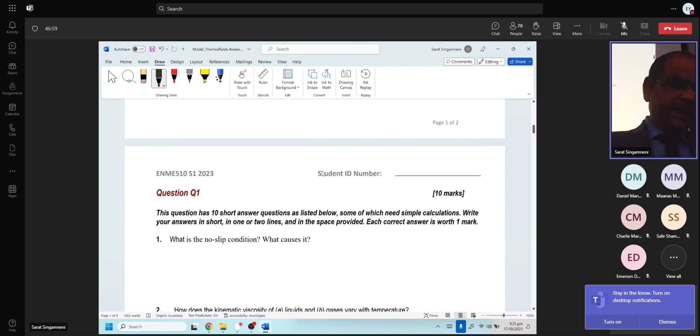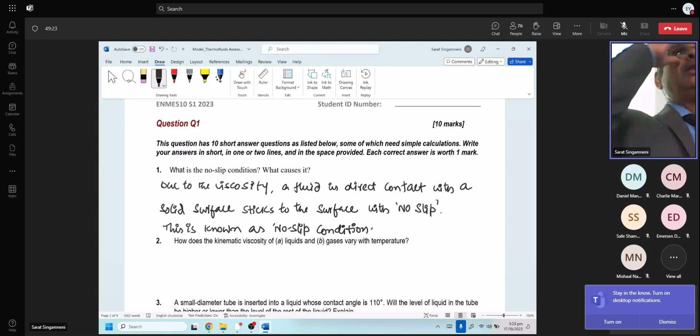What is the no-slip condition? What causes it? The viscosity actually causes this. So I'm just writing, just like I'm writing an exam. The condition leading to the stagnation of the fluid layers close to a solid surface due to viscosity is known as the no-slip condition. This leads to the formation of a boundary layer where the velocity of the fluid flow varies from zero on the surface to the actual flow velocity at some distance from the free surface of the solid.

How does the kinematic viscosity of liquids and gases vary with temperature? We discussed this in class. In the case of liquids, kinematic viscosity, nu, is equal to mu over density. That is kinematic viscosity. And that nu decreases.

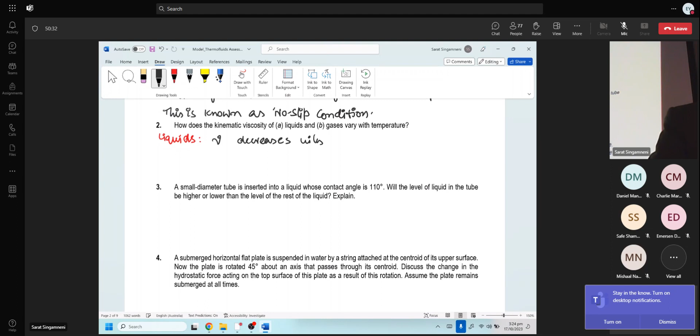And in the case of gases... In the case of liquids, as temperature increases, the resistance between the particles decreases, which is the root cause of viscosity in liquids. So as temperature increases, it becomes easier to make the fluid flow because the viscosity decreases. But in the case of gases, as you increase the temperature, the intermolecular collisions increase, and they are the ones causing viscosity. So that viscosity will be increasing with temperature.

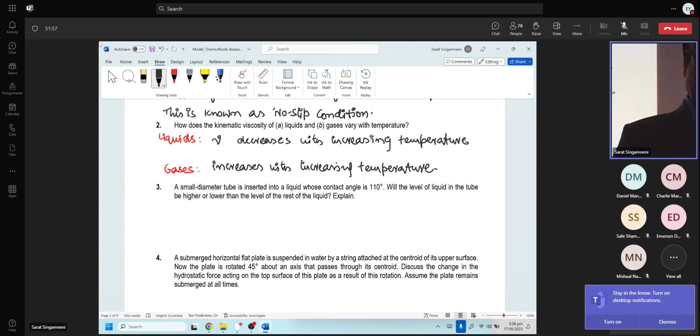A small diameter tube is inserted into a liquid whose contact angle is 110 degrees. So contact angle phi equals 110 degrees in this problem. Will the level of liquid in the tube be higher or lower than the level of the rest of the liquid? If you remember, there's the equation for this.

It's the capillary rise. Let's go to the formula sheet now. This is the formula sheet we're using. The capillary rise H is 2 sigma S over rho G R cos phi. And when phi is more than 90 degrees, cos phi becomes negative, and the height through which the liquid rises will be lower.

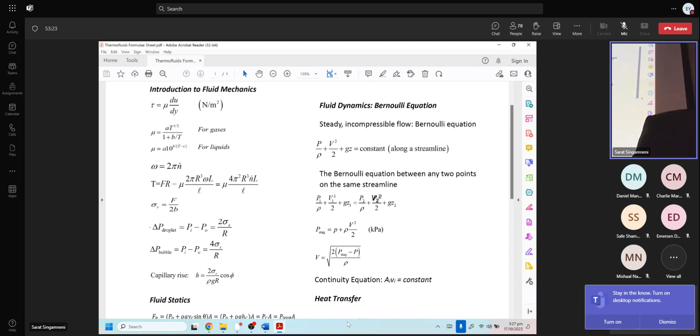So all liquids with contact angle more than 90 degrees will have that liquid column below the free surface, such as mercury, and those with contact angle less than 90 degrees will be rising in a capillary tube because cos phi is positive. So in this case, cos phi is negative, less than 1, hence it will be below the free surface level.

What's happening here? Any question? So where are the... where are the guys? Do you see? Oh yeah, they're here. Online guys, admit. All right, online guys, any other question? Is everything smooth there? Yeah, we can see everything. Very good.

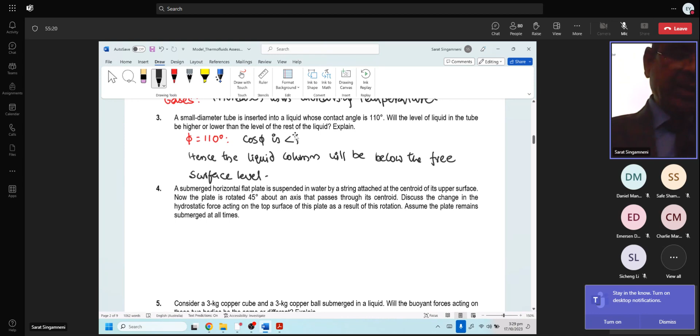A submerged horizontal flat plate is suspended in water by a string attached at the centroid of its upper surface. Now the plate is rotated 45 degrees about an axis that passes through its centroid. Discuss the change in the hydrostatic force acting on the top surface of this plate as a result of this rotation, assuming the plate remains submerged at all times. If you go to the equations sheet, the hydrostatic force Fr is equal to P average times A.

That P average is rho G HC, and it is dependent on the density, the acceleration due to gravity, which are common for both cases given, and HC is the height of the centroid from the free surface, the depth of the centroid of the plane figure from the free surface.

In the problem given, if that is the free surface of water, in one case he is attaching a string there, and the plate is hanging on its centroid horizontally like this. In the second case, the same plate is at some angle like this.

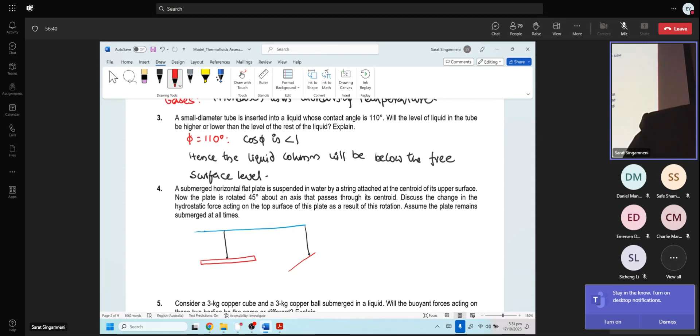No matter what, the height HC is the same in both cases. Therefore the pressure or the hydrostatic force, Fr, is equal to rho G HC times A. Everything is constant. Therefore Fr, the net hydrostatic force acting on the plate, no matter the angle, remains the same in both cases.

Can we move on? Consider a 3 kilogram copper cube and a 3 kilogram copper ball.

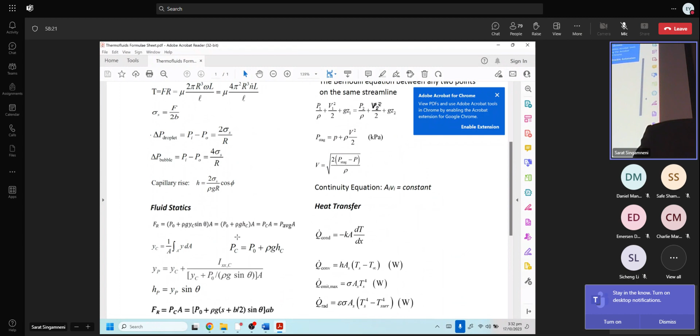What it means is a copper sphere submerged in a liquid. Will the buoyant forces acting on these two be the same or different? Explain. First see what is a buoyant force. Our equations for buoyancy are given here. Fb equals rho times g times the volume. That's it.

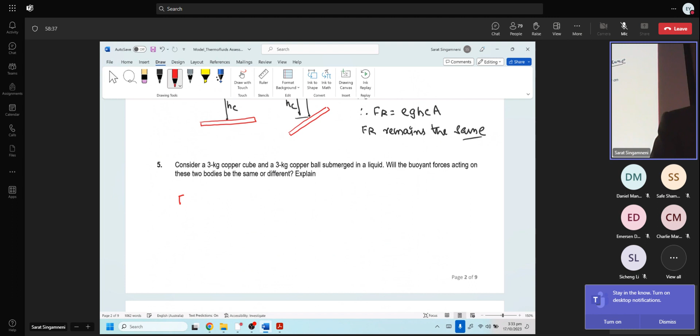Recalling the buoyant force, Fb is equal to density of the fluid times G times volume, I'm using V dot for volume to differentiate it from velocity V. So that is the volume. What we have is a 3 kilogram copper cube and a 3 kilogram copper sphere. What do you think about the volumes of them? Are they equal or different?

Cube and sphere, same mass. Because the density is the same. Density is mass per unit volume. In both cases volume is equal to mass per density, or density equal to mass per unit volume. So therefore the volume is equal to mass per density. Mass is the same, density is the same. So the volume should be the same, whether it is a sphere or whatever it is.

Even if you make the crown, as was worried about by Archimedes in his lifetime, it's a complex shape, but still it will have the same volume as the original volume of the gold or whatever metal was taken in. So volume doesn't change, only surface area changes. The sphere will have the least surface area of all shapes of a given mass. So that volume is the same in both cases.

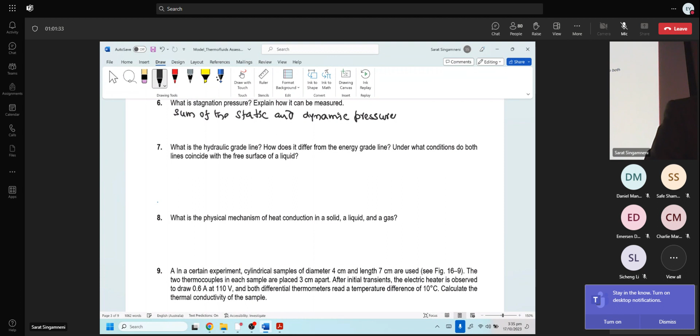We use a pitot tube for measuring the stagnation pressure, the static pressure plus the dynamic component. So remember that. If you put a pitot tube like this, this is the stagnation point. The height through which the liquid column rises measures both the static pressure there plus the V squared over 2G component. So the sum of the first two terms is the stagnation pressure. All good.

What is the hydraulic grade line? How does it differ from the energy grade line? Under what conditions do both lines coincide with the free surface of a liquid? It's the sum of the static and elevation heads. Any problem?

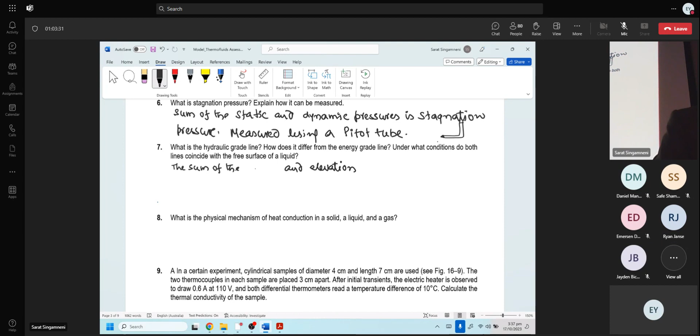I think they call it a pressure head instead of static. Yes, okay. Whatever you say, Jairam. So P over rho G plus Z, these two terms summed, and that equation is represented by the hydraulic grade line. All right.

The energy grade line also includes the kinetic energy head, which is V squared over 2g.

When you consider static bodies such as lakes, the hydraulic grade line and energy grade line coincide with the free surface of the water body. Static fluid bodies such as lakes will have the hydraulic grade line and the energy grade line coinciding with the free surface of the water body. All right.

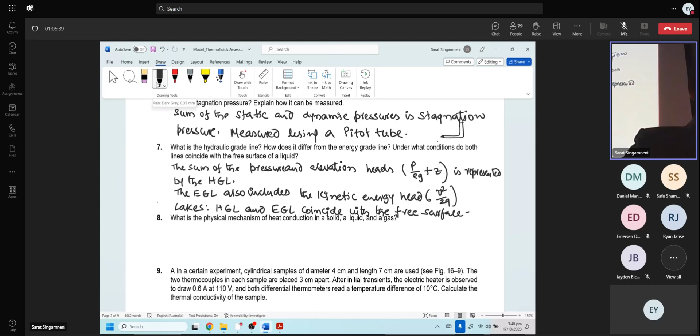What is the physical mechanism of heat conduction in a solid, a liquid, and a gas? So we have solids, liquids, and gases.

In the case of a solid, heat is conducted by either vibration of the atoms or the movement of free electrons. Okay, heat is conducted...

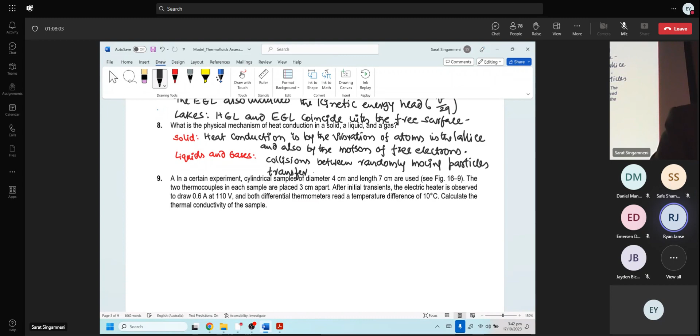Collisions between randomly moving particles will help transfer the energy from high energy state particles to low energy state particles. So this is the mechanism by which heat conduction takes place in the case of liquids and gases.

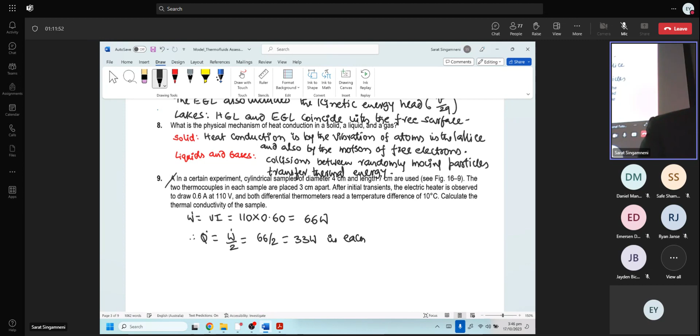The area of cross section is pi D squared over 4, which is pi times 0.04 squared over 4, which equals 0.00126 meter square. And we know Q dot is K times A times delta T over L. If you take high temperature minus low temperature, delta T is a positive value. Therefore, 33 equals K times area 0.00126 times the 10-degree difference, that's what he gave, divided by the thickness given as 3 centimeters, which is 0.03. So from this, K can be calculated as 78.5714 watt per meter degree centigrade or Kelvin.

All right. We solve problems like this in the exercise sheet.

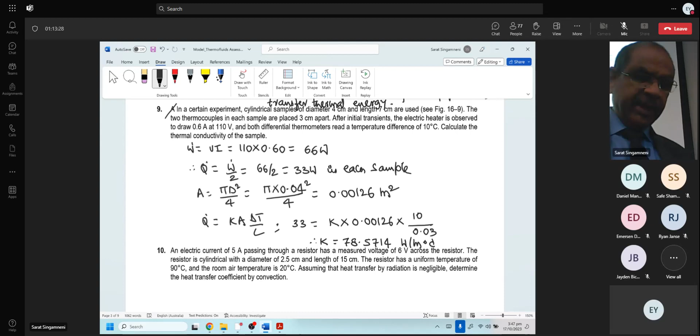And where is this equation available? It is here. Q conducting is minus K A dT over dx. But if you take that dT as higher temperature minus low temperature, you can use the positive relationship. If you use low temperature minus high temperature, there will be a negative value coming from the temperature difference, and that negative and this negative, they cancel. That's the only trick.

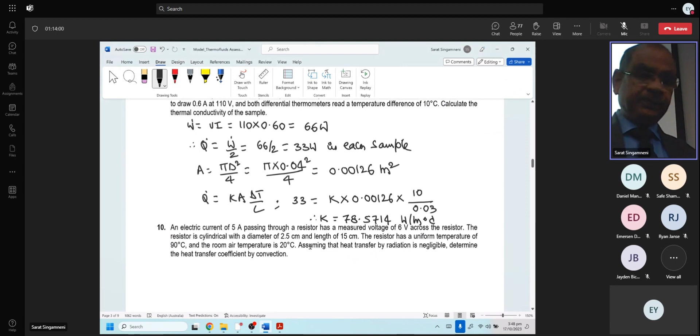All right, any question? An electric current of 5 amperes passes through a resistor, with a measured voltage of 6 volts across the resistor. So the electrical power drawn is V times I equal to 6 times 5 equal to 30 watts.

The resistor is cylindrical with diameter 2.5 centimeters and length 15 centimeters. So this is the case of a thin wire going like that with a length 15 centimeters and diameter 2.5 centimeters. The surface area over which it loses heat due to convection to the atmosphere is the circumferential area. So in case, if I blow this up, this is the diameter D and this is the length L. The circumferential length is 2 pi r or pi times D. That is the length of that circle, times L gives you the overall surface area, that is the area of the cylindrical surface. So therefore, our As here is equal to 2 times pi D squared over 4.

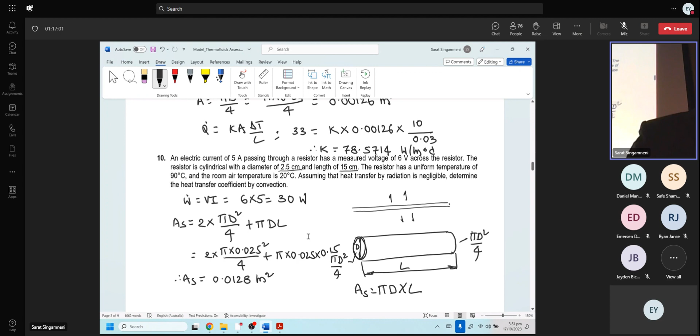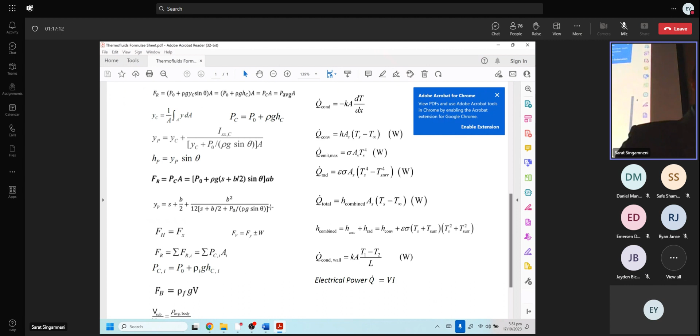The convective heat transfer from this is, where is the equation? Let's have a look into the equation so that you are familiar with it. Q dot due to convection is H times AS times TS, surface temperature, minus T infinity, the ambient temperature. So that is equal to 30 is equal to H times 0.0128 times the surface temperature, given as 90 degrees Celsius, minus ambient temperature, given at 20 degrees Celsius.

So we can use degrees Celsius in this equation, but only one equation, the radiation equation: Q dot due to radiation is epsilon sigma AS times Ts to the power 4 minus T surrounding to the power 4. You need to convert these temperatures into absolute units by adding degrees centigrade plus 273. Otherwise the rest is normal. But in any equation where you are getting both convection and radiation, better convert convection also to absolute temperature value, otherwise inconsistency will come into picture.

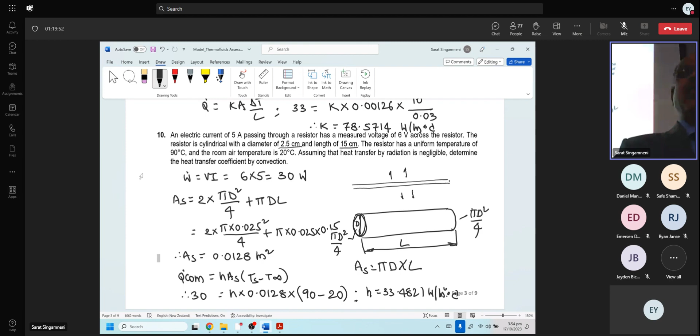All right, we finished 10 questions. Do you have any questions or do you want to ask me anything? Let me check what's happening here. Where are you? Where are they? Are they here? Yes, they're here. Online guys, Jayden Bickers, what is the question?

Hello. If we have a question with the thermal resistances, can you put that on the sheet? What do you mean by that? Thermal resistances, just so you don't have to figure it out in the exam, like when you take resistances in series. Yeah, you have to just figure it out on your own because it's not a formula that I need to add anywhere, it's coming from the fundamental understanding.

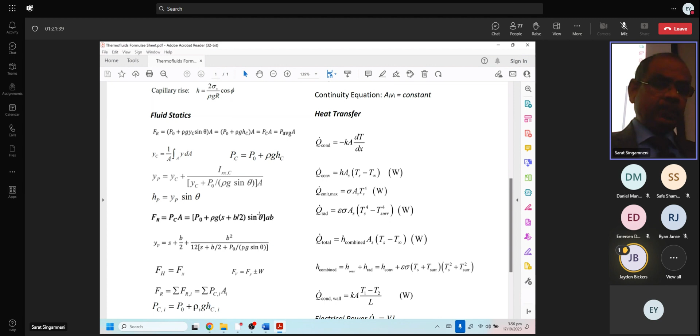For example, the resistance here is temperature: Q dot equal to temperature divided by something. That something in this case becomes L over Ka, length over Ka, that is the resistance there. And in this case, it becomes 1 over H times AS. Similarly for the other one. So I'm not giving any equations for that. Is it okay? Yep, all good.

Derive the Bernoulli equation considering the forces acting on a fluid element moving along a streamline. What is the time? Four. So do you really want me to derive this again? Okay.

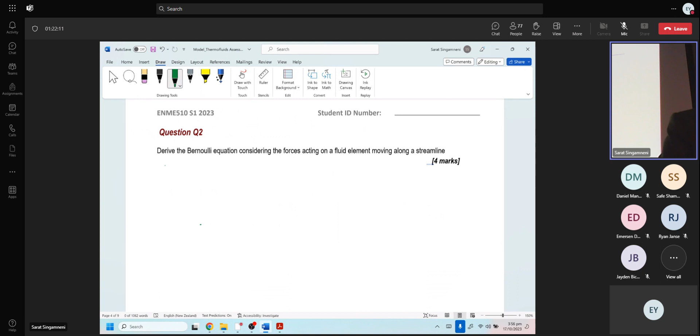What we are doing here is we are taking a particle that is moving along a streamline like this, and we are considering a small particle of the fluid. On this side, the pressure is P, and on this side, the pressure is P plus an additional dP. The weight of the fluid particle W acts downwards, and that is the normal direction. We consider the component of this along this line, and let's say this angle is theta. We know sigma Fs equal to mass times acceleration in that direction. But we have an expression a times ds is V times dV, one of our equations from kinematics. From this, we can write acceleration as V dV over ds. In a similar way, we can use V dV over ds for that part.

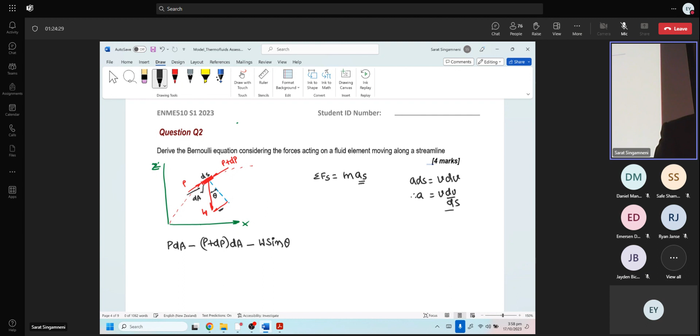The net forces acting on this element are P times dA, the force acting here because we're taking that cross-sectional area as dA and the length of this element as ds. So P times dA minus (P plus dP) times dA, and W sine theta acting in the negative direction. That is the net sum of the forces acting on the fluid particle along the displacement direction.

This is equal to mass times acceleration, but that acceleration term can be replaced by V times dV over ds.

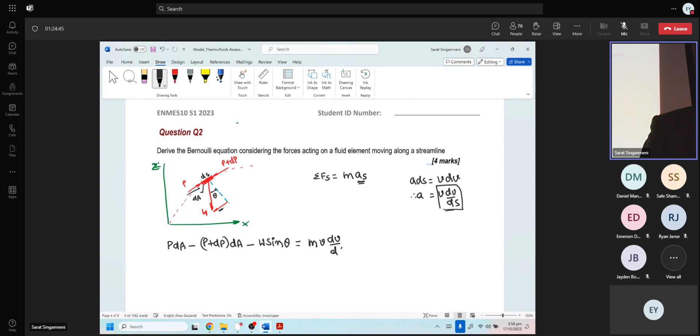We can write mass as rho times density times volume. But volume is dA times ds, so that is the mass. And therefore the weight W is equal to mass times acceleration due to gravity, which is rho dA ds times g.

Sine theta: here we are taking a small element ds along that direction, and that is your dz. This is dx, and that is the length of that element ds. Because this angle is theta, we can write sine theta as equal to dz over ds. So by substituting these into that main expression, we can rewrite that equation.

Minus dP dA, cancelling out the other terms, minus rho times g times dA times ds times dz over ds, equal to rho times dA times ds times V dV over ds.

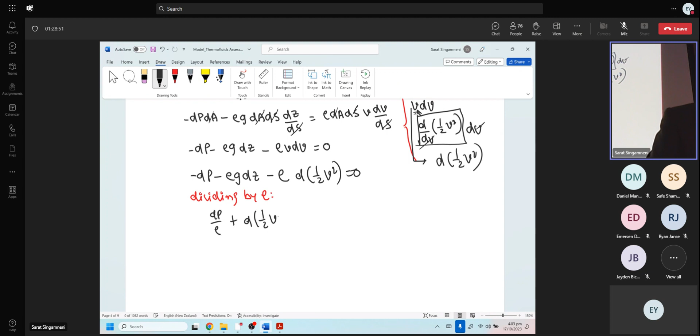Dividing through by rho, we get minus... we can also kick out that negative sign all through. So dP over rho plus d of half V squared, plus g times dz, equal to 0.

Integrating this becomes integral of dP over rho. For constant rho, it becomes P over rho, plus integral d of anything is that thing itself — like integral d of half V squared is half V squared — plus gz equal to constant. This is the Bernoulli equation along a streamline.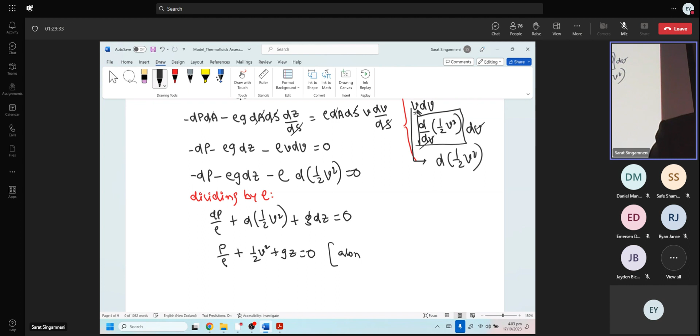What? Move on. Any question? Jayden, are you there?

So this problem is very similar to the friction problems we solved in statics, but one half is dry friction, the other half is when there is a liquid film between them — how does the force change? For that, if you recall your statics course, we need to draw the free body diagram of this.

The free body diagram: the weight W acts vertically downwards, and we resolve this into an X component and Y component. We call this WX, this is WY, and if this angle is 20 degrees, we already saw many times this angle is 20 degrees too. And your external force F is acting horizontally there.

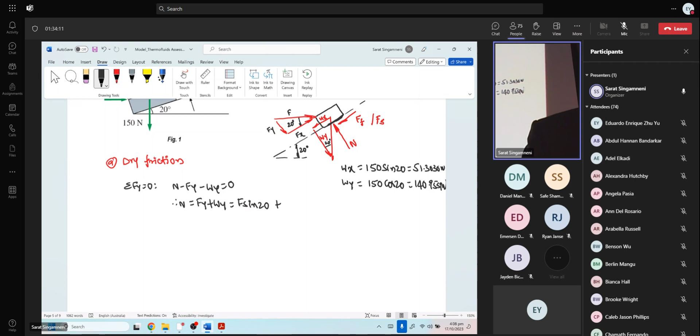140.9539. Wx and Wy are known, so N is... plus Wy, which is 140.9539. That is the normal reaction. But the friction force Ff will be the maximum frictional resistance possible because it's already in motion.

The only coefficient of friction we are given is 0.27. We consider that as the kinetic coefficient of friction: 0.27 times F sine 20 plus 140.9539. From this, the friction force equals...

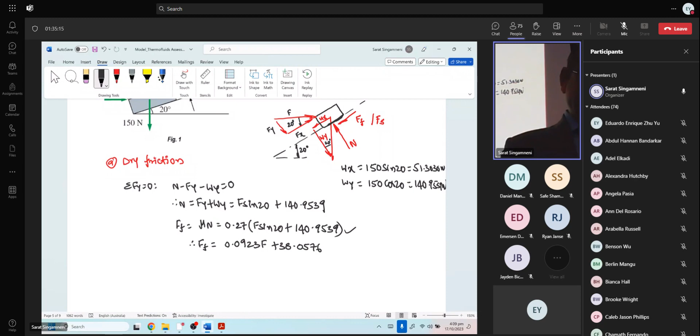0.0923 F plus 38.0576 after simplifying that equation. We still don't know what that force F applied is. We are waiting for that.

Now we consider sigma Fx equal to 0, which gives Fx minus Wx minus friction force equal to 0. Why am I applying static equilibrium condition there? Because it is said that it is moving with constant velocity. Constant velocity case is equivalent to static equilibrium case.

We did this in earlier problems also, you should be able to recognize this. So from this, F cos 20 minus 51.3030 minus 0.0923 F minus 38.0576. I'm substituting, what is F equal to 0?

In this, F is the only unknown quantity. If you solve, we get the force. The force to be applied equals 105.4536 Newton. So that is the force required to push this block upwards with a constant velocity.

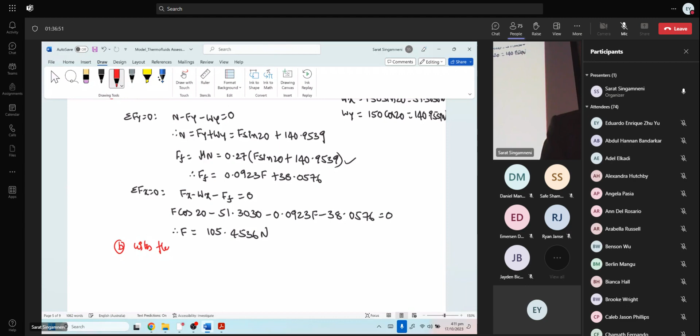This is from statics, there is nothing new here. Now comes the new part, that is with fluid film. So when we put a fluid film, friction will be gone. There is no friction anymore. So instead of friction force, there will be a new force coming in, that is the shear force applied by the fluid film.

And that shear force, we know, F shear force equals tau, the shear stress applied by the moving body on the film, times the area of that shear. But tau in Newtonian fluids is mu times du over dy, where du over dy is the slope of the velocity profile. And where are these equations?

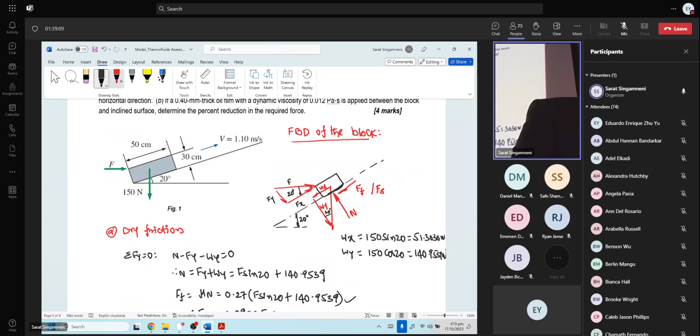Now what is mu? Therefore Fs is that mu is given in this problem. Can you check? Dynamic viscosity mu is 0.012 Pascal second. So that is what we need to use, 0.012 times the velocity, which is changing when you apply a film, when you create, say, an oil film here between that surface and this one.

I am showing that in an exaggerated manner like this. Say that is the oil film, and this is your solid that is moving with a velocity 1.10 meter per second. The oil film on this surface will have zero velocity, and here its velocity will be 1.10. The film height is given as 0.40 millimeter thick, so this is 0.40 millimeter, and the velocity is changing from 0 to 1.10 meter per second.

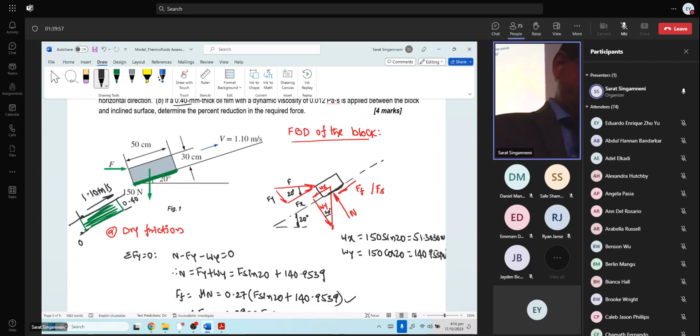So du, the variation in the velocity, is 1.10 divided by the thickness of the film dy, which is 0.40 millimeter, and that you need to convert to meters. So 0.4 in meters is 0.0004, times the area. What are the dimensions of this?

This is 50 centimeters, the 30 centimeters is the thickness, the width is 20 centimeter. So the area on which it is resting on the fluid film is 50 times 30... no, 50 times 20. So 50 centimeters is 0.50 meters times 0.20 meters. And from this, we get the shear force acting between the bottom surface of the crate that is moving and the fluid film as 3.3 Newton.

This is the resistance to the movement, not the actual friction force. Now, using again, we don't need to go through all of that we did earlier. What we have is along the x direction, the horizontal component Fx minus Wx minus Fs, that shear force, must be equal to 0. So F cos 20 minus Wx, which is 51.3030, minus Fs, which is 3.3, equals 0. From this, the force necessary to move this is 58.1073 Newton. Agreed?

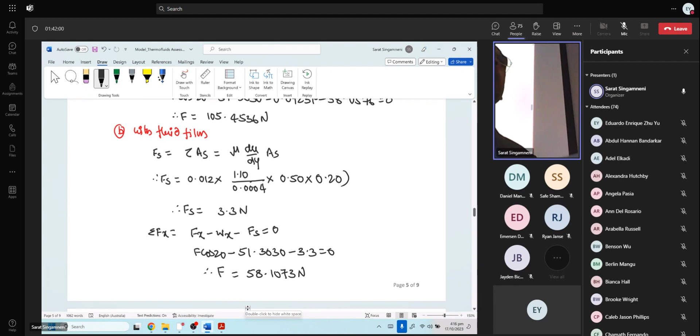So if you are just moving that block in dry condition, you need a force of approximately 105 Newton. And if you are having the oil film, the force necessary became almost half. Now you see how the oil we use between moving surfaces actually helps in reducing frictional effects.

Any question for me?

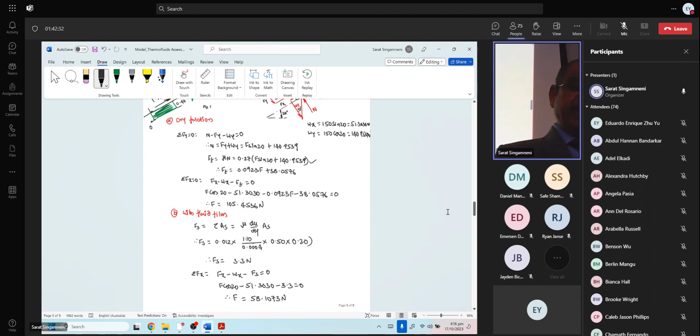Remember, this is not the true time to solve. I'm explaining, bringing the background, covering the foreground, and then also solving. So don't consider this as the true time to solve. You need to be just solving them without worrying about too many things.

Okay, what's happening here online? Is everybody safe and sound? Emersen, safe and sound, sir. Thank you, wow, okay. Any niceties to exchange with anybody here, friends, relatives, anybody else? I don't know, but I'll say hi to everyone. Hi everyone. Guys, this is the last chance for you to say bye to anyone because this is our last session, maybe for your lifetime, isn't it? Pardon? This is what people are seeing. Hi. Okay, anybody wants to turn on their video cameras? This is the last chance, please. Online guys. Hello, so who is the friend here? All right, that's great. Okay, I think that's enough. Thank you.

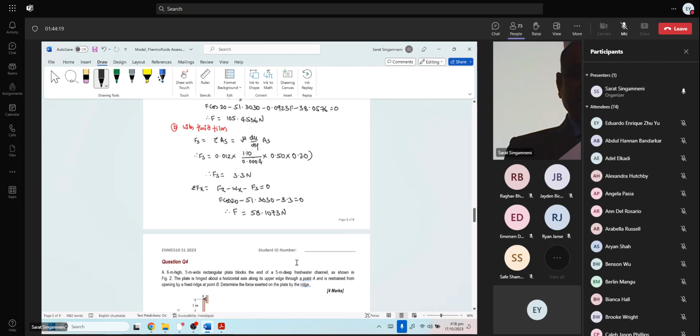Let's continue. Very interesting problem. This actually joins the fluid statics with the normal statics that we did earlier.

Let's see what happens. A 6-meter high, 5-meter wide rectangular plate, which is this one, blocks the end of a 5-meter deep freshwater channel. That is what it is. As shown in this figure, the plate is hinged about a horizontal axis here at A, along its upper edge through point A, and is restrained from opening by a fixed ridge at point B, that is this one. Determine the force exerted on the plate by the ridge.

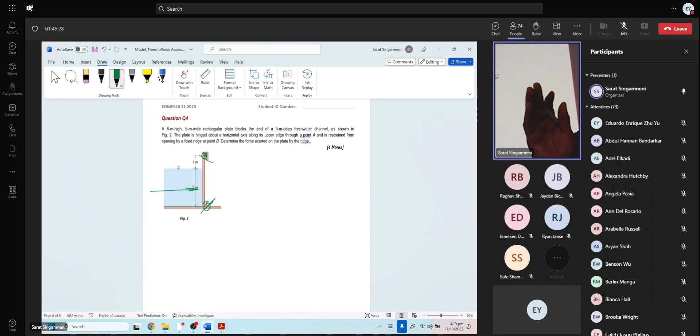Because this fluid is pressing against this plate, and the plate is restrained from movement at the hinge and also at this point, the fluid pressure acts on this one, and point B and point A will offer resistance. He's asking what is the resisting force at ridge B. So we need to consider the free body diagram of the plate in this case.

Let me enlarge it a little bit. And that is A, and at B. At A is a hinge.

When you remove a hinge, what kind of reaction forces do we put? We need to add a horizontal unknown force AX and a vertical unknown force AY. We don't know both of them.

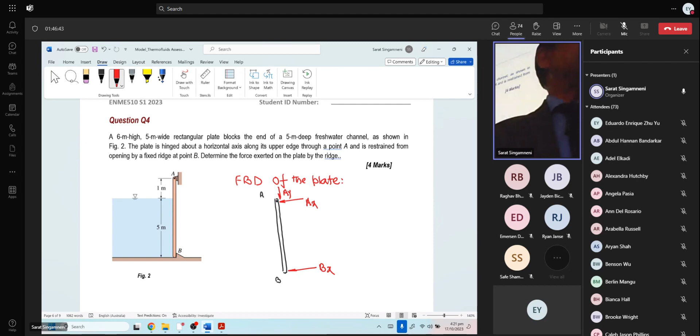And at B, it is pressing against a vertical stopper. Neglecting any horizontal resistance, we can simplify that as a force acting in the x direction like this, that is the force he's asking you to calculate. And what will be the net effect of this hydrostatic force acting due to the liquid column? We can simplify that as one single force Fr, and that Fr will act at some distance like this.

And now under the action of all these forces, that plate is in static equilibrium. So we can now apply the static equilibrium condition. But the only thing that is unknown is where Fr is, and at what distance it is going to act.

And by the way, we need to mark the water level here. So the water is up to that level. And our dimensions are: this is 1 meter, and that is 5 meters. Our Fr force acts at a vertical depth equal to Yp or Hp from the free surface. We need to calculate both Hp and Fr, then we can solve this problem.

And where are these available? If you go to the formula sheet, the hydrostatic force acting on a body is Fr equals P0 plus rho g yc sine theta A. P0 is the atmospheric pressure, as we discussed in the lesson. It acts on both sides of the plate, so we can neglect that. If you remove that, this becomes rho g hc times A. That is the hydrostatic force. Let us calculate that first: Fr is equal to rho times g times hc times the area.

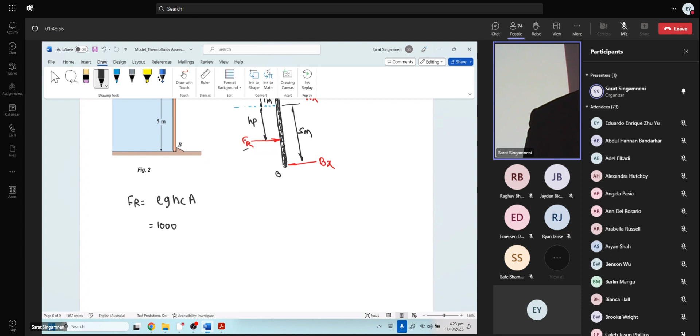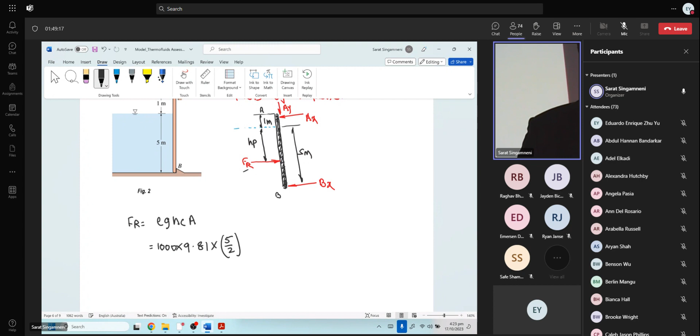The density of water is 1000, times 9.81, times the center location. That is from the free surface, at a depth of 2.5 meters, isn't it? Half of that height. So that is 5/2, which is the height of the centroid from the free surface.

Vertical plate times the area of the plate, which is 5 meters by 5 meters. So this will give you FR equal to 613,125 Newton. That is FR.

Then at what depth is it going to come? YP. For that, the equation is YP equal to YC plus IXXC over YC plus P0, blah blah blah. The P0 term we can neglect because we are neglecting atmospheric pressure on both sides. So this reduces to YP equal to YC plus IXXC over YC times A. That is the simplified form.

I told you in class, I will not be simplifying these equations for every condition. So YP actually equal to YC plus IXXC divided by YC times area. It's coming from that equation.

Let's substitute what we know: YC is equal to 5/2 plus IXXC, which is the moment of inertia of a rectangular plate about an axis passing through the center and parallel to the base, BD cubed over 12. So this is 5 times 5 cubed over 12.

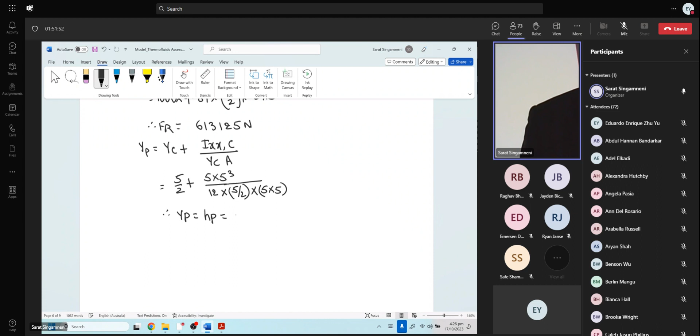YP, which is also HP because this is 90 degrees, sine 90 is 1. So HP is YP sine theta, and theta is 90 degrees, so HP and YP both are the same, equal to 3.3333 meters. That means this distance, HP, is equal to 3.3333 meters. From the free surface of the liquid, it is acting at a depth of 3.3333 meters.

Now, if you want to calculate what is Bx in this free body diagram, we take sum of the moments about point A equal to zero, so that Ax and Ay are avoided. Writing sigma MA, moments about point A, sigma MA equal to 0 will give you FR times (HP plus 1) minus Bx times 6 equal to 0.

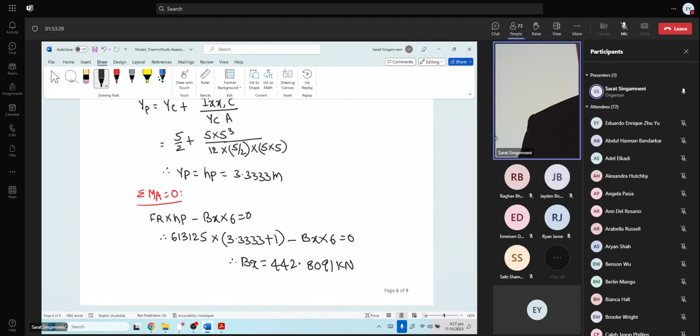Therefore, FR is 613,125 times the distance, which is 3.3333 plus an extra 1, minus Bx times 6 equal to 0. From this, we get Bx equal to 442.8091 kilonewton. That is the reaction at the bottom.

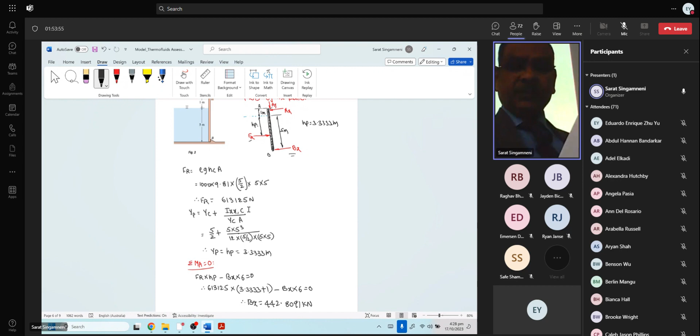Now tell me if there is any question on this. Anybody? All right. Anybody online? Anyone having any question? Emersen, no question. Thank you, very good. Ryan Janse, no question. No question sir, wow, what is this man? Okay good.

Let's move on. Water is flowing through a venturi meter, a tube like this with decreasing diameter and increasing diameter. It is a very popular device in fluid mechanics. If you go into any hydraulics laboratory, you will find this. It is quite an interesting device.

People who are taking up mechatronics, mechanical engineering, or marine engineering will actually be going through a lot of the use of these things later on. But anyway, this is what is known as a venturi meter. So it is having a varying cross section like this. The diameters are 7 centimeters here and 4 centimeters here.

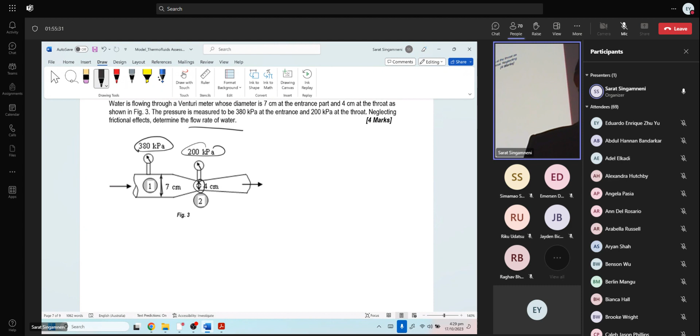The pressure is measured to be 380 kilopascals here and 200 kilopascals here. Neglecting frictional effects, determine what is the flow rate of water. By the way, no matter how the cross section varies, the net flow rate through this venturi meter remains the same everywhere, but the velocity will change according to the cross section.

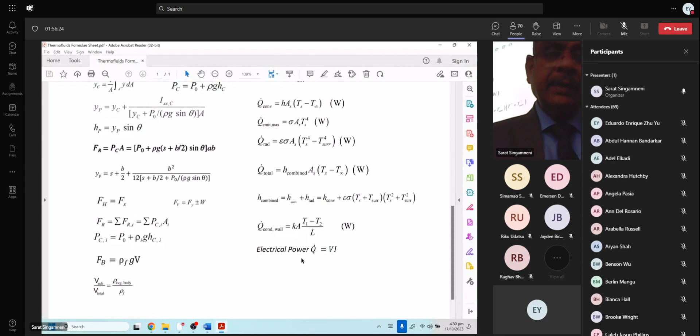So first things first, there is something called the continuity equation. According to that, where is it in our formula sheet? Continuity equation: Ai Vi equal to constant. Area times velocity is constant at any section. What it means is A1 V1 equal to A2 V2 equal to A3 V3 and so on.

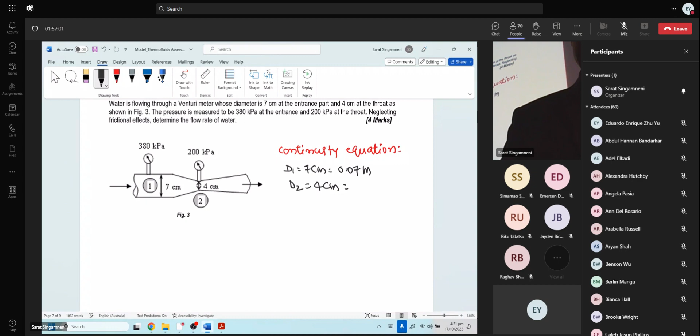So first, if I use that equation, our D1 is 7 centimeters, which is 0.07 meter. D2 is 4 centimeters, which is equal to 0.04 meters. We have A1 times velocity 1 equal to A2 times velocity 2 according to the continuity equation. So from this, V2 is equal to A1 over A2 times V1, which is equal to area 1 is pi D1 squared, area 2 is pi D2 squared. This can be written as D1 squared over D2 squared times V1.

So therefore, V2 is equal to 0.07 squared over 0.04 squared times V1, which gives V2 equal to 3.0625 V1. We got one relationship between the velocity at V1 and velocity at V2.

We don't know both of them now, but we can apply Bernoulli's equation between points 1 and 2, and that is P1 over rho g plus V1 squared over 2g plus Z1 equal to P2 over rho g plus V2 squared over 2g plus Z2.

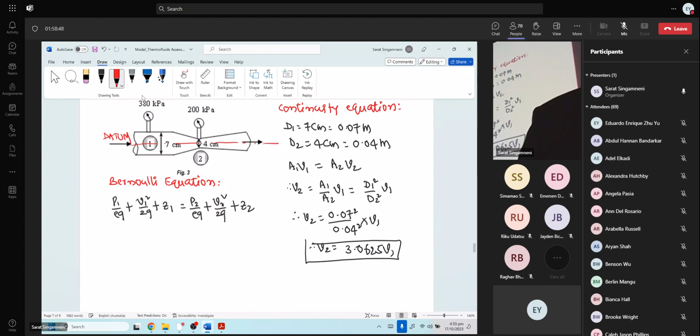Because these are all central points, if I take that central line as the datum, we have Z1 equal to Z2. So we can cancel Z1 and Z2. And the remaining equation is...

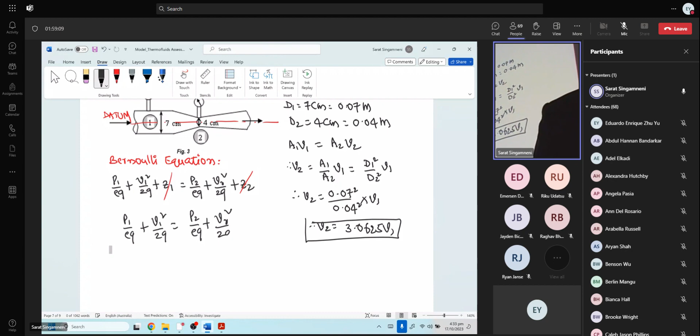P1 over rho g plus V1 squared over 2g equal to P2 over rho g plus V2 squared over 2g. We can also cancel the g from this equation. Let me remove the g's since they appear throughout in the denominator. So this is the expression we are getting.

So therefore, V1 squared over 2 minus V2 squared over 2 -- but for V2, I will replace this as 3.0625 -- V1 squared over 2 is equal to P2 minus P1 over rho.

So from this, therefore, V1 squared minus 9.3783 V1 squared is equal to 2 times 200 minus 380 times 10 cube over 1000.

There is a negative sign on the left side and a negative sign on the right side. They can be cancelled, and finally we can simplify this as 8.3783 V1 squared is equal to 360. From that, V1 is equal to...

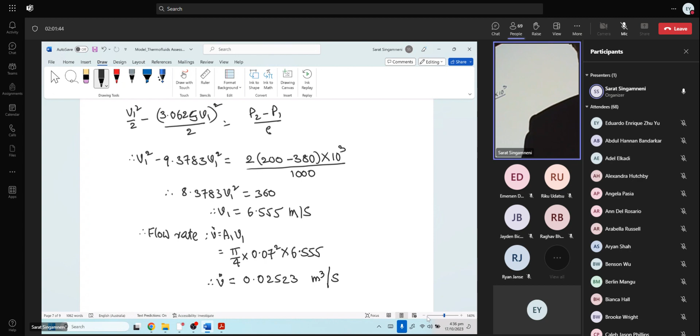Applying the Bernoulli equation, we get one equation, but there are two unknown velocities. The second relationship comes from the continuity equation, and that's it. Solve both of them together and you get that unknown velocity.

Yeah, I squared the number, and that 2 I cross multiplied and took to the right side. So 3.0625 squared is 9.3783, times V1 squared.

Hello sir, that squared is this. But the 2 I took to the right side -- I took the 2 common to both of them, so I moved it to the right side. I took 2 common here and moved it to the right side, so it becomes 2 times P2 minus P1, over 1000.

So Jayden, do you have any problem? Yeah.

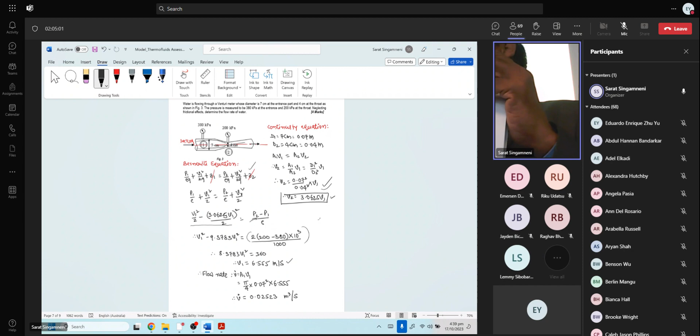It should, because it's coming from the continuity equation. The flow rate should be the same whether you use A1 times V1 or A2 times V2. Since it's the same, I did not waste any time and just used A1 times V1.

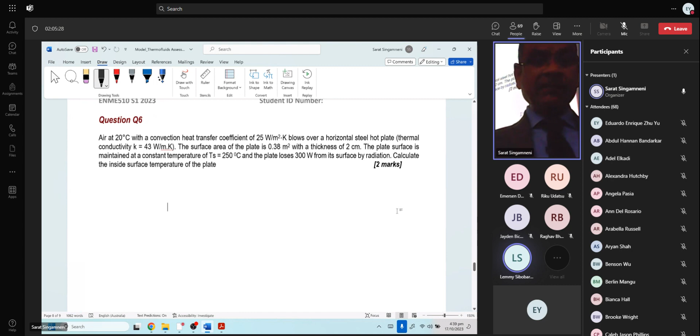Air at 20 degrees Celsius with a convection heat transfer coefficient of 25 watts per meter squared Kelvin -- so there is a convective heat loss coefficient here, 25 watts per meter square Kelvin -- blows over a horizontal steel hot plate. Thermal conductivity K equals 43 watts per meter Kelvin. The surface area of the plate is 0.38 meters square with a thickness of 2 centimeters.

The plate surface is maintained at a constant temperature of Ts equal to 250 degrees Celsius, and the plate loses 300 watts from its surface by radiation. Calculate the inside surface temperature of the plate. So this is the case of combined heat transfer. Let's have a look at that.

Keep quiet, keep quiet.

So there is a plate, and there is air flowing on the surface of the plate. And the thickness of... alright, I need to take some action here. Sorry for that, okay.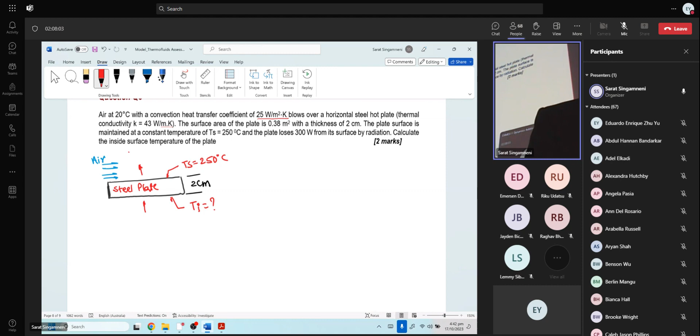So what he says is this steel plate is losing heat. It is flowing from here and going all the way there. This is all recorded, by the way. The thickness of this plate is 2 centimeters, and the top surface is at 250 degrees Celsius. The surface on the inside is the temperature we don't know, let's call that Ti. And there is ambient air at 20 degrees Celsius.

He gave that the plate is losing heat. The plate surface is maintained, and the plate loses 300 watts from its surface by radiation. So Q dot due to radiation is 300 watts, which is already given. Let's solve this problem.

We know Q dot due to convection. Where is this equation? It is Q dot due to convection equals H A S times Ts minus T infinity, which is equal to... your heat transfer coefficient due to convective heat loss is given as 25, times the area of cross section is given as 0.38, times the temperature of the surface, 250, minus ambient temperature, 20. I told you, you can use degrees Celsius for this equation. And from this we get...

2185 watts. That means 2185 joules of energy is lost due to convective heat loss per second from that surface. Then Q dot radiation is straight away given. That means this surface is losing heat due to radiation and also convection, so it is a combined heat loss there.

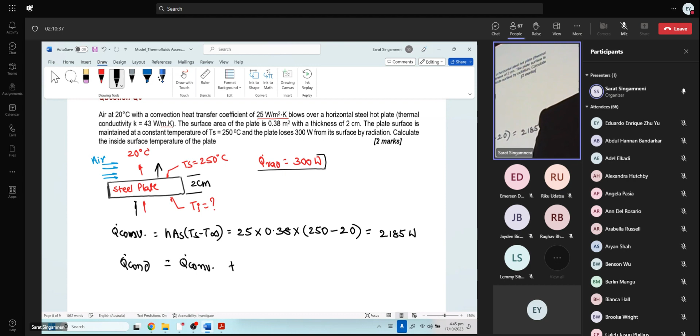But the total heat that is gained and transferred through conduction, Q dot conduction, is the heat flowing inside and through the plate due to unidirectional conduction. Under steady state conditions, whatever heat is flowing through the plate due to conduction should be the same as the heat lost due to convection and radiation. So this must be equal to Q dot due to convection plus Q due to radiation.

But we know the heat loss due to conduction, coming back to this equation, is K A dT over dx. You can kick out that negative sign if you're using high temperature minus low temperature. Let's do that. Therefore, K times A surface times the inside temperature minus the outside surface temperature, divided by length L, must be equal to Q due to convection plus Q lost due to radiation.

So from this we can write: K is the thermal conductivity, 0.38 is the area, times the inner surface (which we don't know) minus the outer surface at 250, divided by the thickness of 0.02 meters. This must be equal to 2185 plus 300. So from this, Ti is equal to 253.0416 degrees Celsius. That is the answer.

Any question? Online, anybody having any question? No questions. Very good, okay. Can I move on?

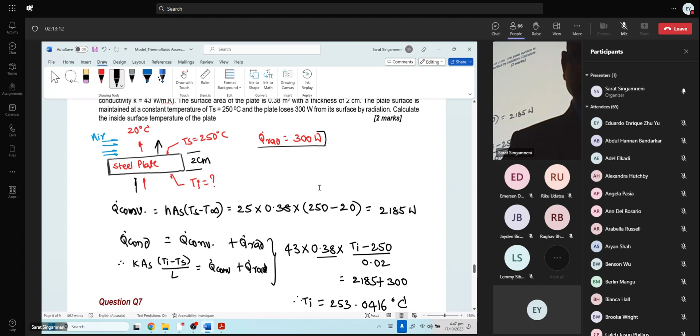Seventh question. The diameter of one arm of a U-tube is 5 millimeters, while the other arm is larger, as shown in this figure. If the U-tube contains water and both surfaces are exposed to atmospheric pressure, determine the difference between the water levels in the two arms. The contact angle of water is phi equal to 0. The surface tension and density of water at 20 degrees Celsius are sigma S equals 0.073 Newton per meter, and rho equals 1000 kilogram per meter cubed.

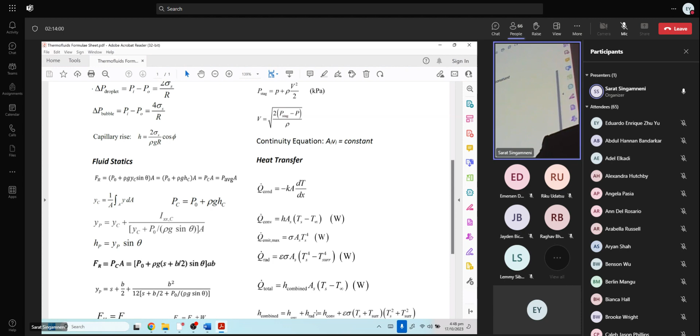This is the case of capillary rise, and for capillary rise we have an equation here, which is H equal to 2 times sigma S over rho g r times cos phi. Let's take that equation into this. We know H is equal to 2 times sigma S, cos phi, over rho g r.

So from this we can substitute: 2 times sigma S, the surface tension, 0.073, times cos 0, divided by density 1000, times g 9.81, times the diameter which is 5 millimeters, so the radius is 2.5 millimeters, in meters that is 0.0025 meters. So from that, H is equal to 0.005953 meters. That's it, that is the height difference.

So in simple terms, this is H is equal to 5.953 millimeters. All right, let's solve the last one.

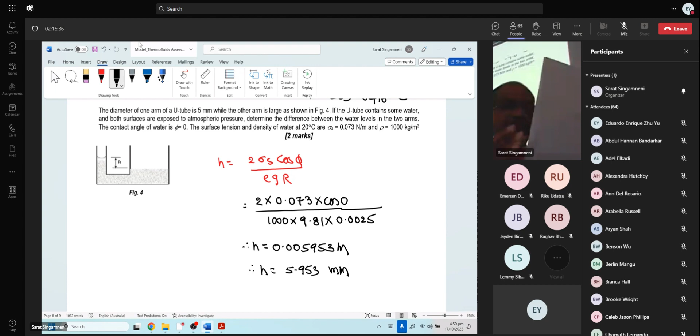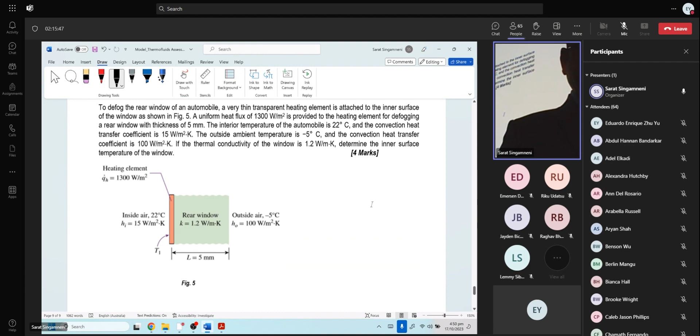To defog the rear window of an automobile, a very thin transparent heating element is attached to the inner surface of the window as shown in this figure. So this is the heating element there.

A uniform heat flux of 1300 watts per meter square is provided to the heating element, so the heating element is getting Q dot heat flux into it. For defogging, the thickness of the window is 5 millimeters - the glass part is 5 millimeters. The interior temperature of the automobile is 22 degrees Celsius, that is the inside, and the convection heat transfer coefficient here is 15 watts per meter square Kelvin.

That is the heat loss, because that film on the inside is heating up. Some part of that heat will be lost to the interior of the car, and some will be conducted into the glass plate, and some of that conducted heat will also be convected to the outside, because you are solving the problem for steady state. That means whatever is going in should leave at the end. So the problem is like this.

We have, say, this is your heating coil - that is the thin film of the heating coil. You are sticking it to the surface of the glass at the back, the rear glass, and then you have the glass like this - let's say that is the glass. So the thickness of this is very small, so that is 0.005 meter.

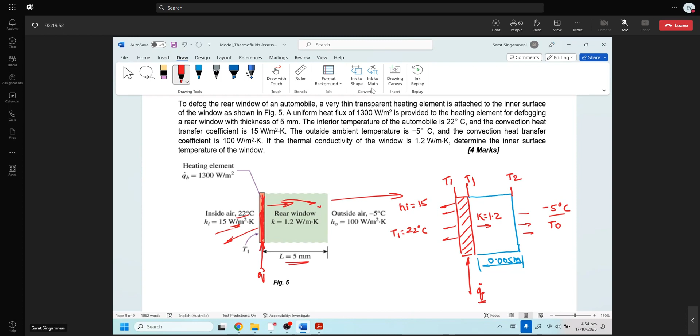Heat is flowing both ways in this problem. It is not going from inside of the car straight to the outside, or from the outside to one side - not in one direction. In problems like this, don't use the resistance method, just use your normal calculation - that is, what is the total heat transfer per unit area?

For example, Q dot due to convection on the inside is the heat it is losing on this side. What is the equation for Q dot convection? H times A times TS minus T infinity. When you use small q dot per unit area, we just kick out that area and write the expression, so it is equal to HI times the temperature on the surface T1 minus the temperature in the ambient, which is inside the car, Ti. So that is 15 watts times T1 minus 22, where T1 is the temperature of the heating element.

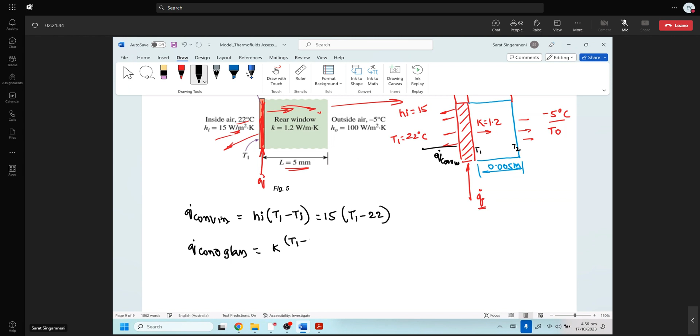Now Q conducted in the glass part - this is conduction. The equation for Q due to conduction is K times A times dT over dx. But that A should be removed when we are using heat flux per unit area - that's the only difference. So small q is equal to K times the high temperature T1 minus the low temperature T2, because it is changing from T1 to T2 here, divided by the length L. This is equal to 1.2 times T1 minus T2 divided by 0.005, which is the thickness. So that is the conduction part.

And there is another component, the convective heat loss, Q due to convection outside, lost from the outer edge of the glass. So Q dot due to convection on the outside is equal to H on the outside times T2, the temperature on the surface, minus T outside.

So this is equal to 100, the heat transfer coefficient given due to convection on the outside edge, times T2 minus of -5. Remember, it is not -5, minus of -5.

So that gives you this as equal to 100 times T2 plus 5. But whatever heat is being conducted through this is our Q dot due to conduction in the glass part. That one and the heat loss due to convection here, they must be equal because some part of this heat is going into the glass conduction and then it is being lost due to convection.

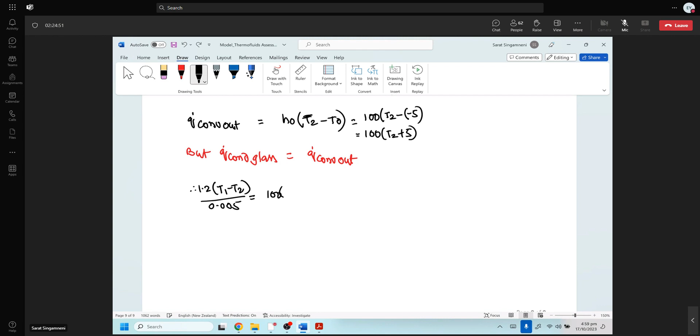And therefore, 1.2 times T1 minus T2, divided by 0.005, is Q dot due to conduction, is equal to 100 times T2 plus 5. Simplifying this, 1.2 times T1 minus T2 is equal to 0.50 times T2 plus 5.

So T1 minus T2 is equal to 0.4167 T2 plus 2.0833. So from this, T2 is equal to 0.7059 T1 minus 1.4705. We are getting a relationship between T2 and T1.

So we can't go much further than that with that. We need to go to the other equation, that is... it's too big.

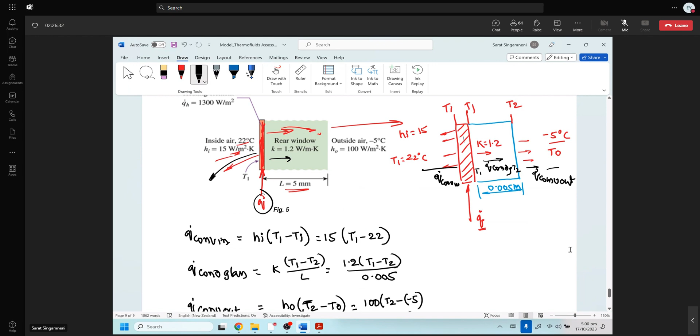We know Q dot, the heat that is generated here, is shared by this convective heat loss plus this conductive heat taken away. Some of it is going to the left into the car and the rest is going into the glass due to conduction. Therefore, the total heat flux into the heating element must be equal to Q dot due to convection on the inside going into the car plus Q dot due to conduction going into the glass.

Agree? So from this, we know 1300 is the heat going per unit area. It is given as 1300 watts per meter square. That is equal to, we know this is 15 times T1 minus 22.

And this is plus 1.2 times T1 minus T2, divided by 0.005. Can you see T1 and T2? This is an expression, but T2 is this quantity. If you substitute it into this T2, this will reduce to one single equation with T1 unknown.

We can calculate the T1, and that is what is asked. So therefore, 1300 is equal to 15 times T1 minus 22, plus 1.2 times T1, minus, instead of T2, I'm writing this one, minus